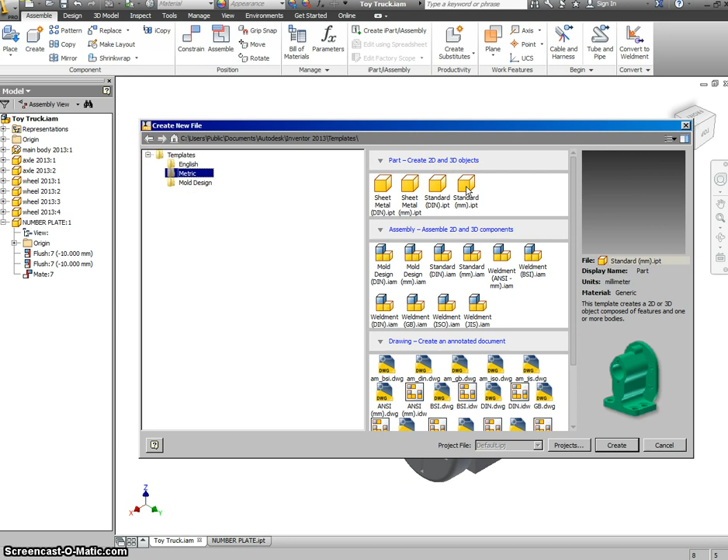Again, going to start with creating our sketch onto our horizontal plane, and the rectangle that we are going to draw and dimension will be 30 millimeters by 6 millimeters.

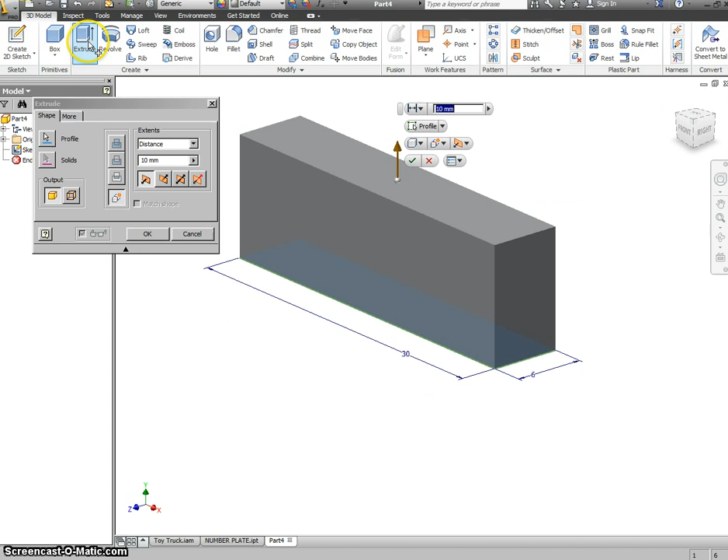Finish the sketch, extrude, and this time we're only going to extrude it through 2 millimeters, and OK. So that gives us our basic shape.

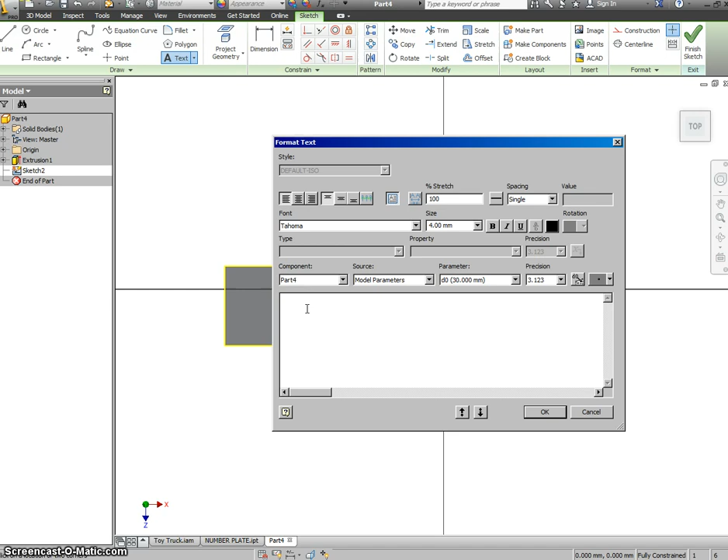Now we want to see about adding some letters onto our model. So we're going to sketch on our top surface, select our text, and our size of the text we want to add in is going to be 4 millimeters, and we'll put in the letters that we want. You can decide your own one, your own personalised number plate, and OK it.

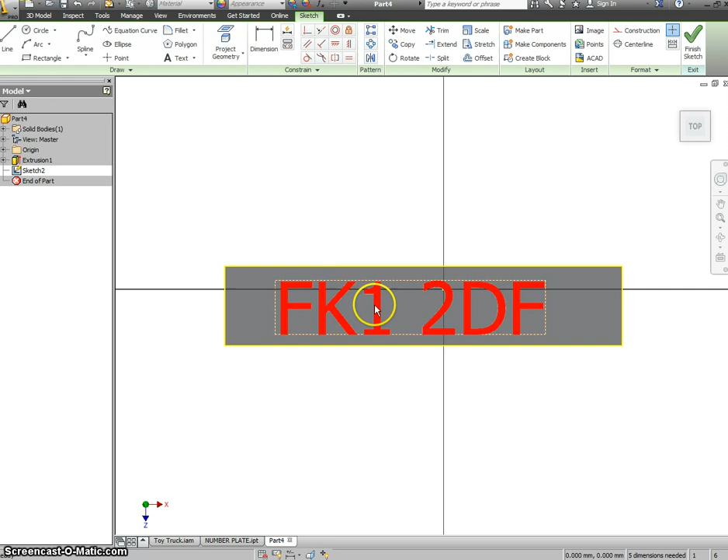If we're not too happy with the position and we try and move it at this stage, you'll see you can't do it because it's still looking to put in more text. So what we need to do is come out of the text command by simply right clicking and OK. Now we're in a position to move the text to a place where we're happy with it, and we will finish the sketch. Now this might look okay at the moment, but the letters are simply lying on the surface.

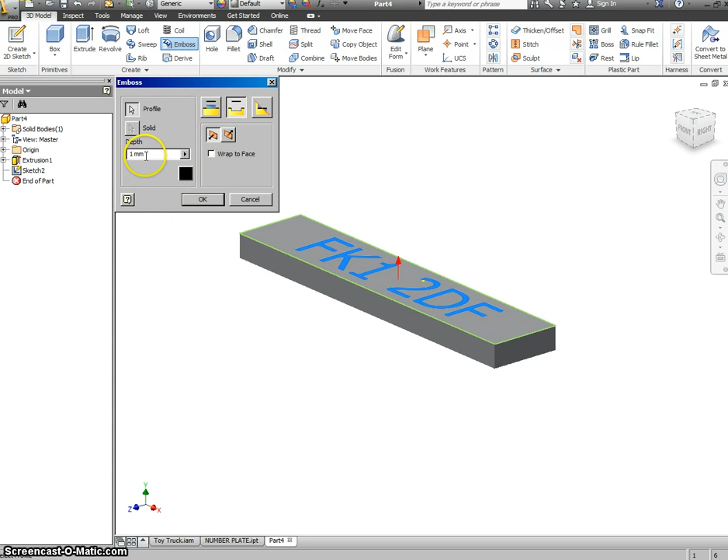They're not being engraved or embossed. So I would like to now emboss our letters. I would like to engrave them in, and the distance we're going to engrave in 1 millimeter, and OK. So now you can see the letters look like they have been engraved in.

I'm going to change the colour of my number plate, and I'm simply going to go to yellow. Again, you can make your own choice here. But if we look at this front on, you'll see that it's actually very hard to see the letters.

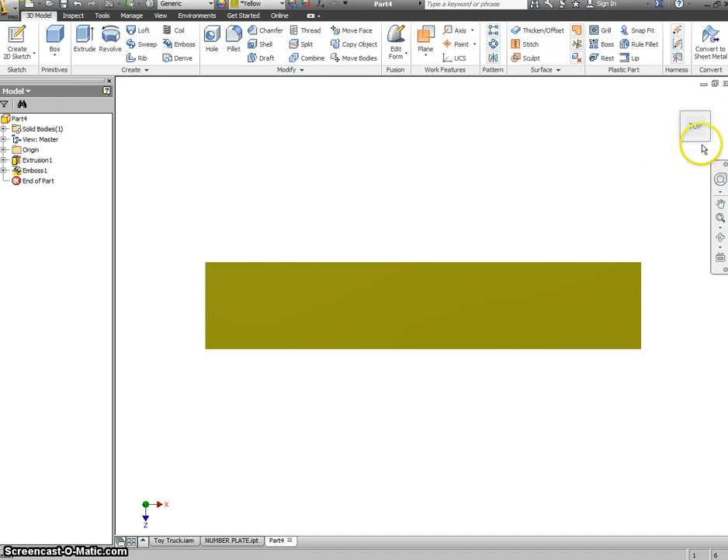So we need to really change our letters here. So if I hover over them, right click, go into properties, I can change these, and I'm simply going to go with black. Right click into properties, and I'll do this for each of my letters. And we can go on and change it all the way through.

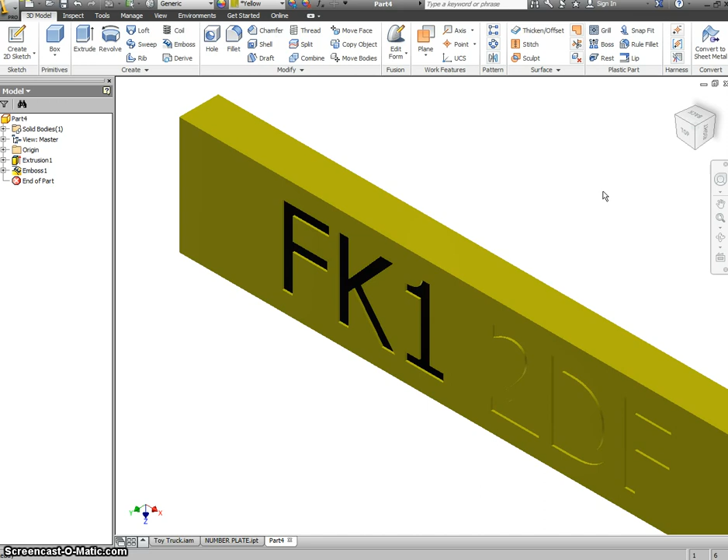Once you've done that, that is your number plate finished, and we're ready now to start thinking about how we attach this onto our toy truck. So save this as number plate.

Then what you need to do is open up your assembly, and I'll show you how we will then attach our number plate to our model. You'll see I've got the number plate in the front sorted, but I haven't done the one in the back, so I will show you that. But you'll see we've used two flush constraints and a mate.

So we need to start by placing our component. So there's a number plate, open, and bring that in. Right click, OK. The first thing we want is to get this part stuck to the back here. So we constrain. We're going to mate this surface with this surface and apply.

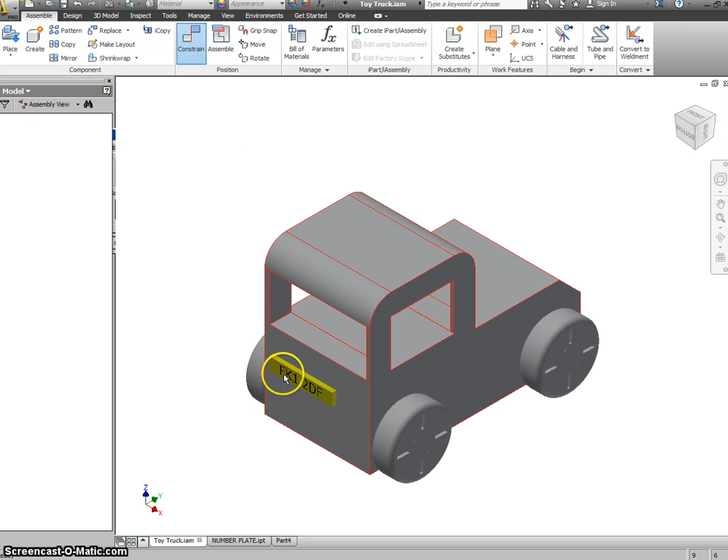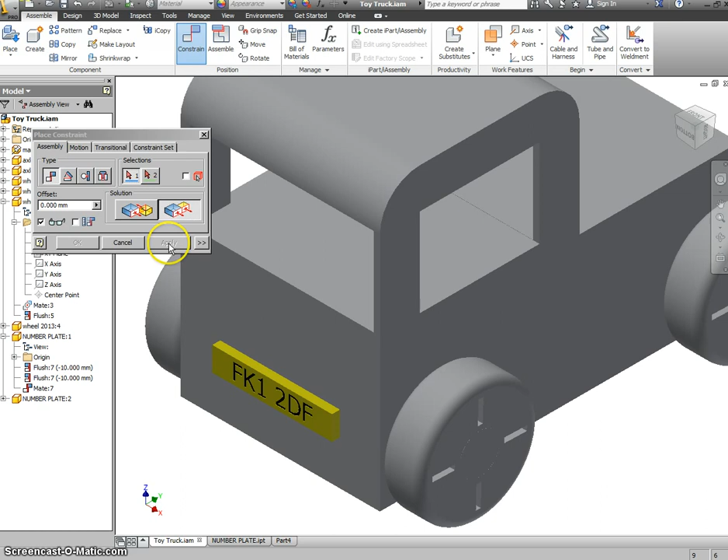So that's now on there, but it will still be in a position to move. The next constraint I want to use is going to be flush, and I would like this side flush with this side, but I'm going to offset it by a value. Now the value will either be 10 or -10. This is very much dependent on which surface you pick first, and apply. So that's added 2 in.

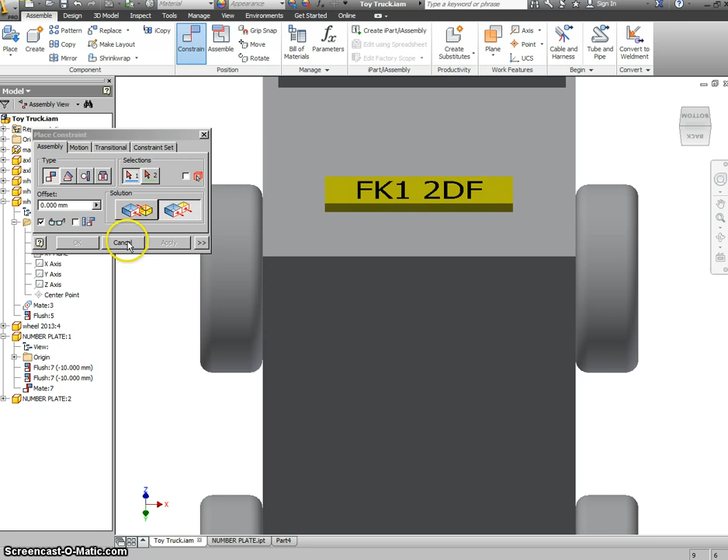Still can slide up and down, so I'm going to look into the underside here. Again, onto my constraint, I'm going to work with my flush. I'm on the underside, flush with this one, but again I can offset it through 10 and apply. And that now gives me my number plate on both the back and the front.

Obviously you've just seen how to put it on the back, but you'll follow through exactly the same process to add your number plate to the front. Okay, thank you.